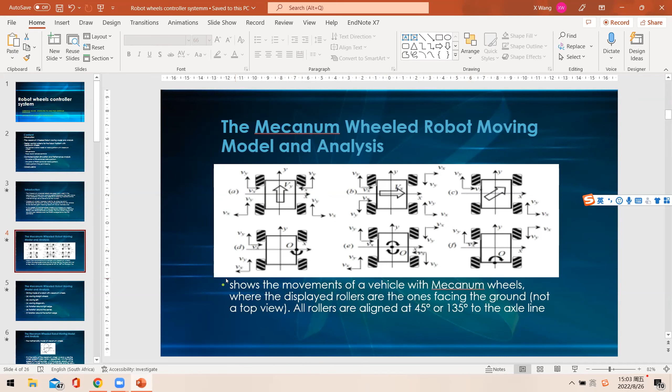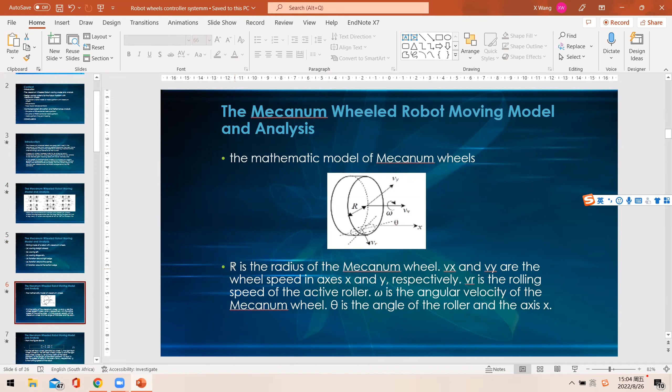These are all the parameters we are going to use in our paper. R is the radius for the Mecanum wheel. Vx, Vy are the speeds of the wheels in the X axis and Y axis. VR is the rolling speed of the active roller. Omega is the angular velocity of the Mecanum wheel. Theta is the angle of the roller and the X axis.

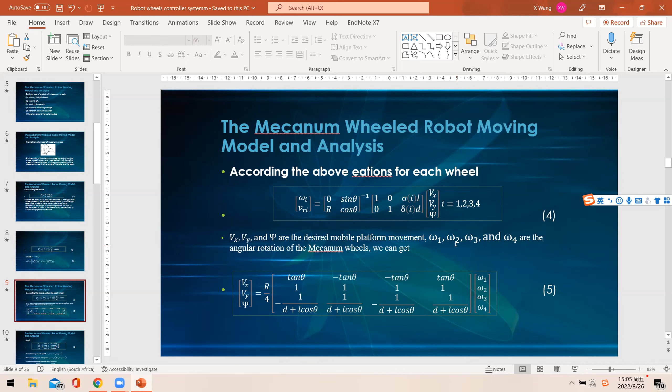This is the equation. We can use this same equation to show omega 1, 2, 3, 4 for the 4 wheels. According to the above equation, we can get all the omega parameters. So omega 1, omega 2, omega 3, omega 4 are the angular velocities for all 4 wheels. We get the results for omega 1, 2, 3, 4.

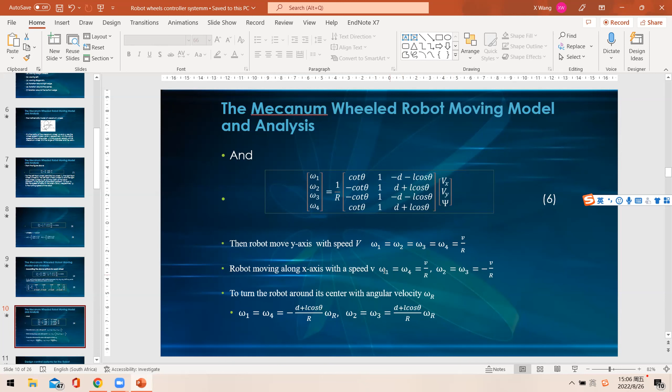For the robot, when it moves in the y-axis with speed v, we get the result for omega 1, 2, 3, 4. They are the same results. When the robot is moving along the x-axis with speed v, we get the result: omega 1 is the same as omega 4, omega 2 is the same as omega 3.

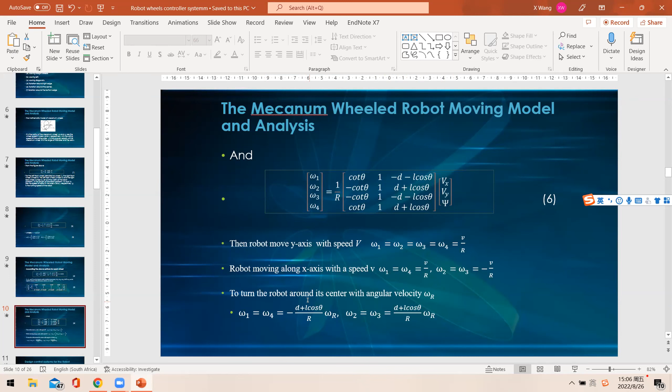When the robot is turning around the center with angular velocity omega r, we get the results as follows.

For the mobile platform, the movement can be achieved through controlling the angular velocity of the 4 Mecanum wheels with omega 1, omega 2, omega 3, omega 4, because the motors can be controlled separately. So in our article, we are going to analyze a single wheel and apply that to the other wheels.

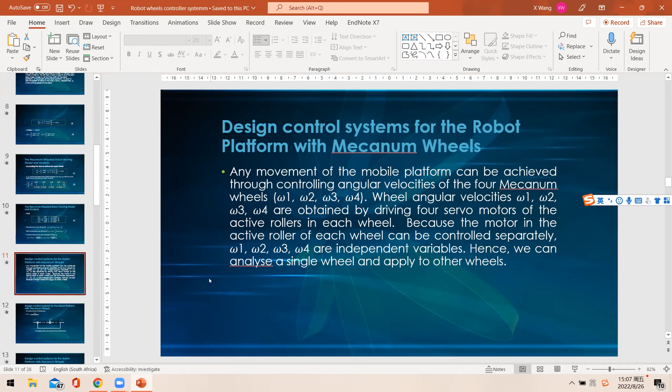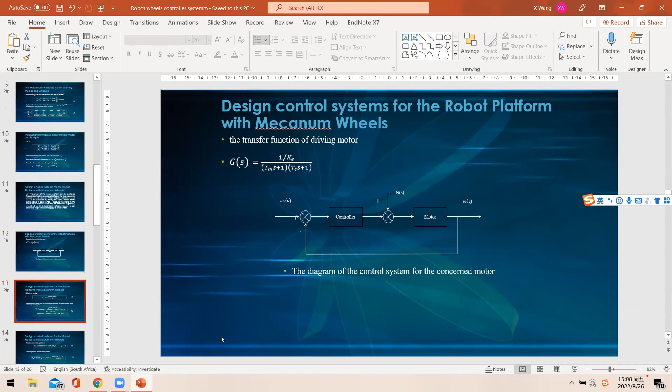We are going to put a PID and a fuzzy neural network controller here. For the PID controller, we can get these equations.

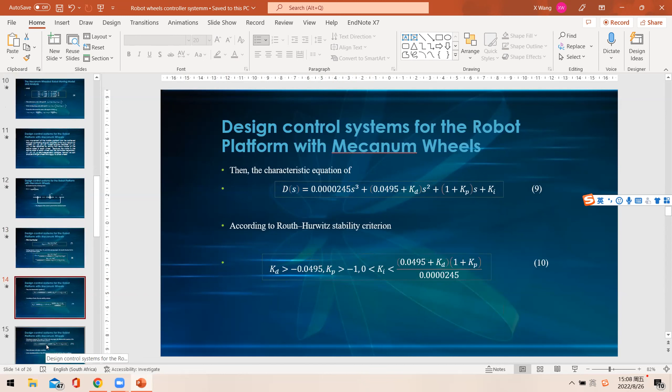When setting the response, assume nu is 0 and omega s is the unit step signal, we can get the PID controller equation as follows. Based on the Hurwitz stability criteria, we need to keep all the parameters bigger than 0, then we get the result for equation 10.

With the disturbance response, when omega s is 0 and nu is a step signal, we get the same result as above. So for the following PID controller system, we are going to choose the parameters to satisfy these conditions.

This one is for the fuzzy neural network controller. I is for input, O is for output. These are three different equations showing the input layer, hidden layer, and output layer.

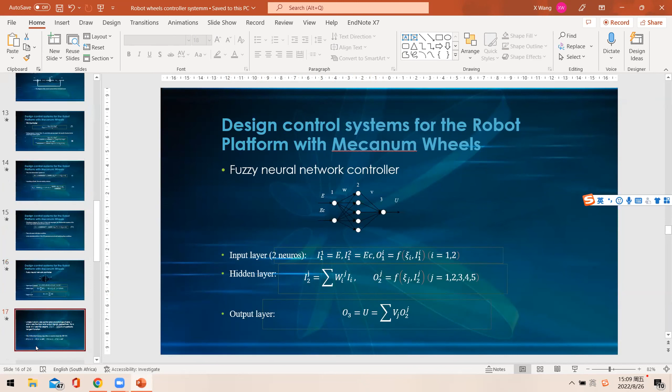E and EC are the error and the change in error. W and V are the weights for the neural network. F xi I is the hyperbolic tangent function. We are trying to get the weights for W and V.

So with the fuzzy rules table, we can get the results for the equation. For this one, we are going to get the result for the U.

Hello, ma'am, sorry for the interruption, you have 2 minutes left. Okay, thank you.

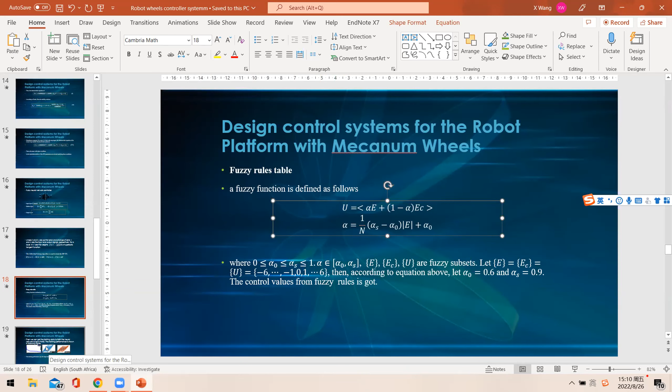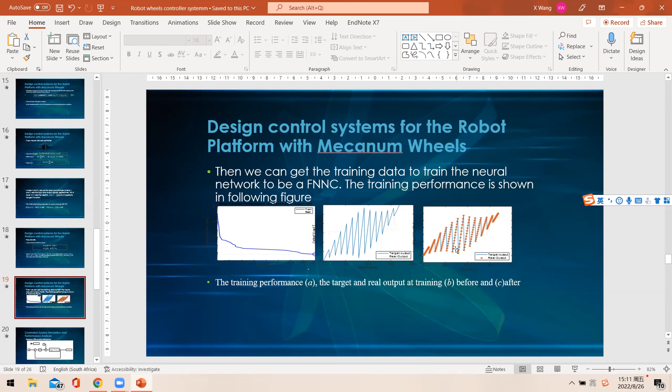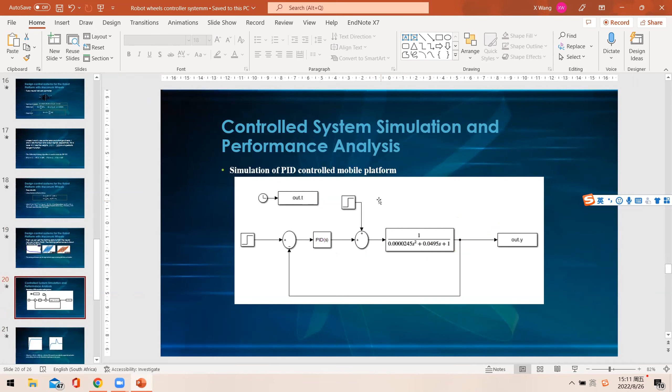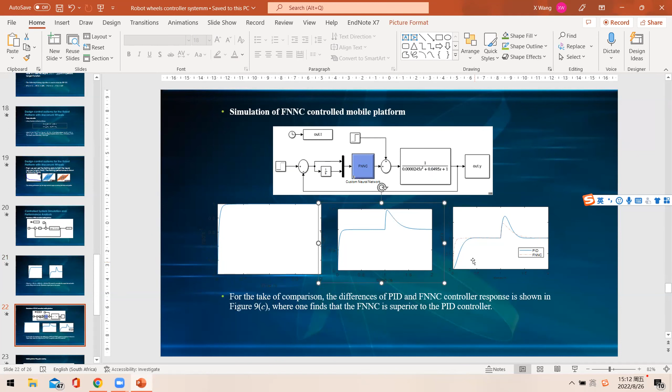Picture C is a comparison of the PID controller and the FNNC controller. We can see from this picture that the mobile platform with the fuzzy neural network is much more stable and faster than with the PID controller.

In this article, we studied the different angular velocities for the four wheels. They can determine the speed and direction for the mobile platform. The simulation results show the traditional PID controller and FNNC performance. The fuzzy neural network controller outperforms the PID controller, being more stable and faster.

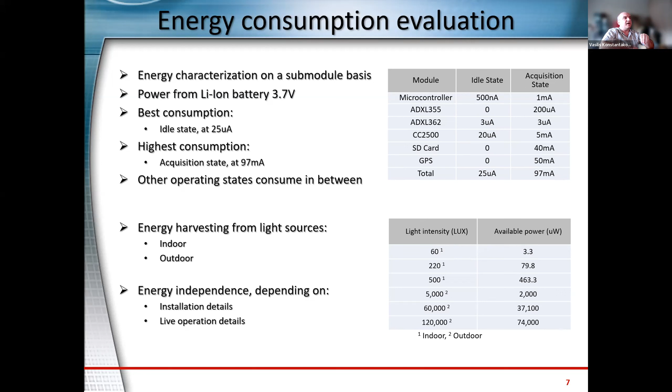Now, this device is also combined, as mentioned, with harvesting logic. The most frequent available energy source within schools is light. Thus, we made a lot of different approaches to harvest light either from indoor or outdoor locations. On the right, you see a table indicative of how much power is gathered by such an approach. According to the specific details of its location, in many cases, the device became energy independent based on this harvesting logic.

At the end, as mentioned, we installed the system in a school building, always together with a reference earthquake monitor so that we can make comparisons. Eventually, a few earthquake events were recorded. Here is one, and we can see the X, Y, and Z axis on the GURALP and on the ADXL355. The curves, as someone can see them, but also the analysis that scientists ran in the earthquake research area showed that it's quite good. The performance of the ADXL355 is quite satisfactory, at the only expense of some increased noise visible in the thickness of the curves referring to the ADXL355.

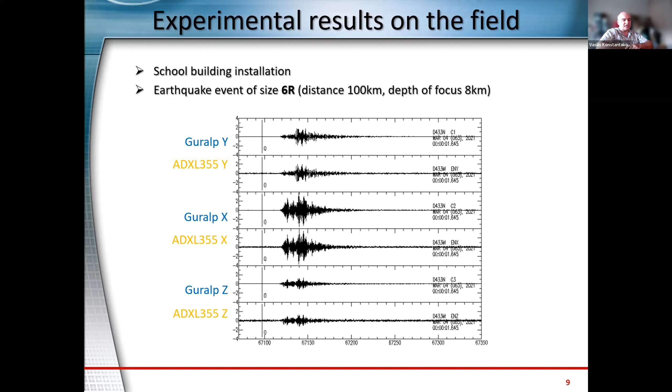In conclusion, an earthquake monitoring instrument was developed with a case study on school buildings and their safety. We tried as best as we could to create a common design for every possible variation of operation. The quality of the acquired data was quite good, and the quality of the low power behavior was also quite good.

And the answer to the original question is that the proposed design can be a possible replacement of existing earthquake instruments, as confirmed not only by me, not being an expert in the earthquake area, but also by scientists who work on this data and these instruments. Thank you very much. Dear author, you have done great work, but I have a few questions. You have taken the sample rate as 200 hertz. What is the basis of it? In place of 200, can we take 180 or 220?

Well, in discussions with scientists mostly dedicated to earthquake monitoring, they said the frequencies we are interested in tracking are close to one, to a few hertz. Thus, they were satisfied with 200 hertz. The most that earthquake monitoring devices provide is 1000 hertz, but it's not frequent to have more than 100 hertz. 200 hertz was a value we agreed on because we wanted to be a bit conservative, since systems must work at this frequency at all times. So we wanted to be conservative but without making sacrifices, and it felt satisfactory to them, so we took it.

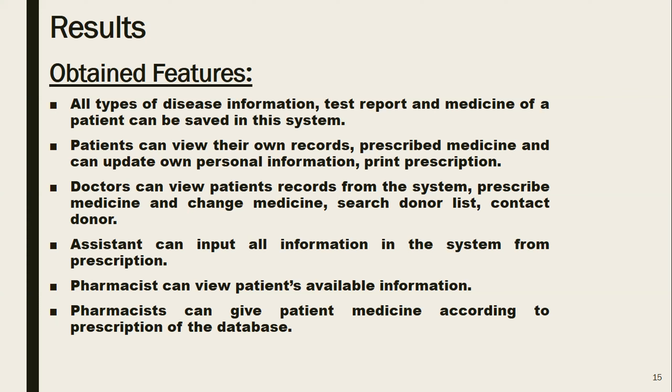Assistant can input all information in the system from prescription. Pharmacist can view patient's available information, and can give patient medicine according to prescription of the database.

E-health system already exists. Now I will discuss the difference with other medical databases. Users like assistant and pharmacists are not in any other system.

Patient information is not kept at this large scale in any type of database system. Patient personal information is saved in our database. Patient can print their own prescription.

Unlike most databases, this database is user friendly and is a multi-user system. It can be used nationally. Unlike other databases, it allows pharmacists to view patient prescription to give medicine.

In this slide, I will discuss the social impact of our system. This system will improve patient care because unlike available databases, it has extra users like pharmacist and assistant who play big roles. It will save time of all relevant users like doctor, pharmacist, and patient. The pharmacist can give medicine more easily. Doctor can prescribe perfect medication and patient records will be saved. It will play a crucial part for future diagnosis of patients.

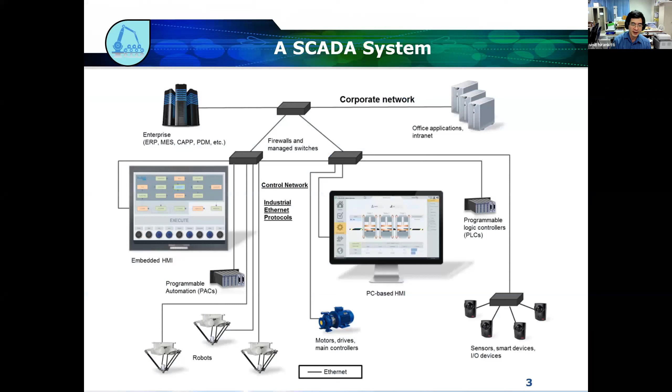The user can interact with the software via a touch screen like you see there. We call it HMI. The SCADA also alerts the user when there is any problem with the machine.

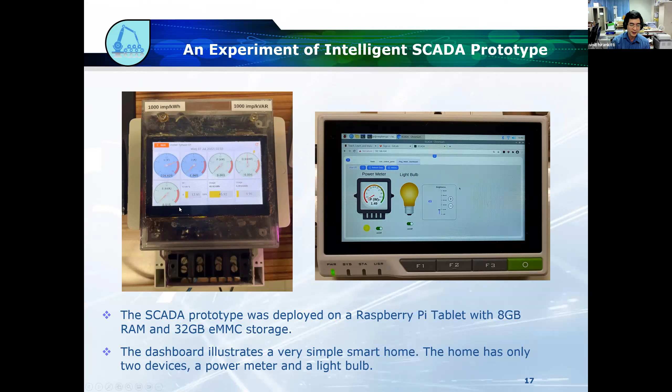We have applied this in our implementation, developing using Python a prototype of a SCADA system, and it's running on a Raspberry Pi tablet like you see here. This is the dashboard, and it's also used for developing a smart meter as well.

In this example, we have a meter as one device, and the light bulb as a device, and then we can interact with it. Everything that I explained using the class diagram, we exactly developed into Python.

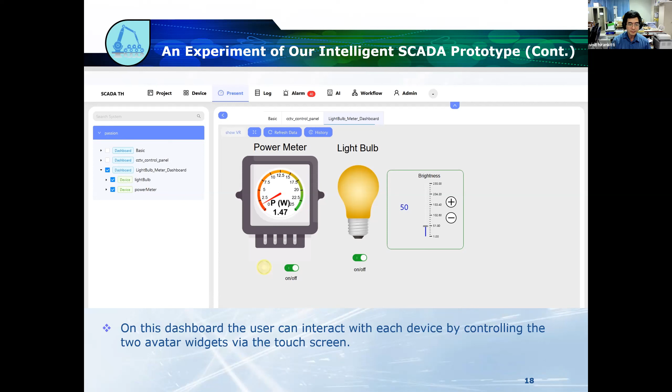So the result of our work is that the SCADA framework is developed entirely using object-oriented modeling, and it reflects the concept of digital twins. It also emphasized the significance of reasoning about the object level and meta level. We believe that this OO representation would allow us to apply logic, and in the future it will combine with logic.